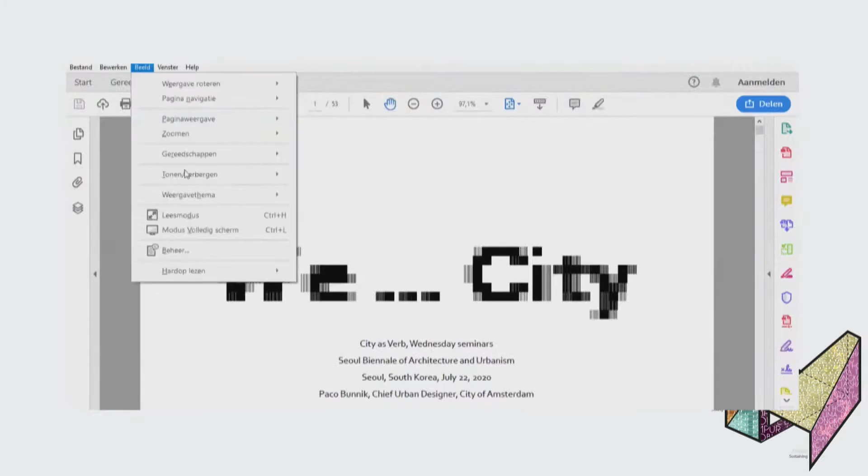Hi. Hi, John. Good morning. Yes, thank you so much for joining. Yeah, great to be here. Although virtual, it's very nice to be back in Seoul. Well, if it's any consolation, it feels like you're in the room right now. You're live. All right. Hey, what's the plan? Shall I start? Sure, that would be great. Yeah, okay, I'll share my screen. Yes. One second. Is this clear? It's perfect, looks very clear.

Okay, let's start. Well, thank you for inviting us to this seminar. In 2019, the City of Amsterdam participated in Seoul Biennale of Architecture and Urbanism. In my presentation, I will share some background of the approach of the exhibition, We City, and explain some more about the urban planning in Amsterdam surrounding this theme.

When asked to participate as a curator of the Amsterdam submission for the Biennale, I thought that the exhibition should demonstrate how we work with this theme of rethinking and reclaiming the city as a collective project. Not only the way we work ourselves, but also reflect with colleagues, supported by the embassy in Seoul, the Dutch embassy, the cultural attaché, which linked us together to Korean counterparts, with whom we had fantastic discussions.

We City, our exhibition, demonstrates how on an international level - here just a case we did with Zanzibar - we co-work and research on cultural exchange, and on a local level, how we are experimenting with collective and inclusive ways of urban planning.

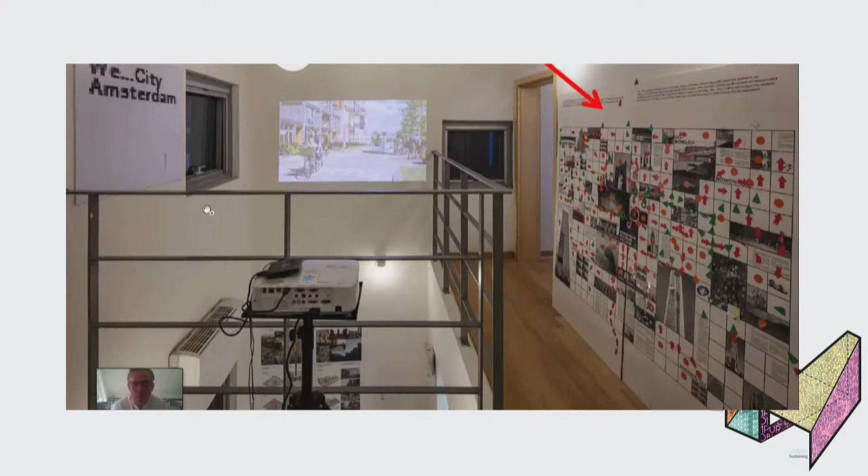So it's very interesting, I think. I would like to come back and talk to the students and maybe make these kind of itineraries, and by walking, discussing how the city is evolving. So we also gave them a wall in our exhibition, so that they were really incorporated in our exhibition.

I'll tell something about Amsterdam right now, what we're doing, how we're planning, where we come from, where we're going, and also reflecting on the Building the Resilient City theme, which is the 2021 theme for the Seoul Biennale of Architecture and Urbanism.

Amsterdam, this is a nice series of maps which shows the development of the city of Amsterdam, from the 1250s to right now. You see that it started as a fisherman's village right on the open waterfront, directly connected to the sea. And later, when the Dutch traveled abroad with the VOC, the East India companies, we got richer. And we founded this famous canal district city, which is right here.

And what you see happening is that because the city is growing, blue becomes green. So water is, we call it impolderen, it's made into polders, gained from the sea, made for agricultural purposes, to feed the citizens of the growing city.

Then in the industrial age, train lines were made, and more blue becomes green, and the city is still growing. Then in the 60s, you could call it the age of the car. New car roads were planned, new land was made. Also the surrounding cities were growing, as you see. But this is really car-planned modernism, in a way.

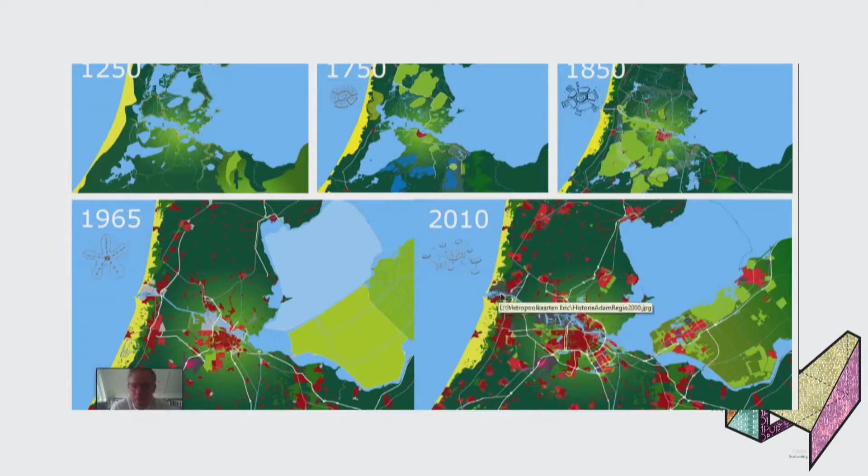And now we're coming to a state of sort of a network city, where we not only talk about Amsterdam anymore as a growing city, but as a whole network of a metropolitan region. So it's a different kind of approach. We used to be only Amsterdam, but now we are more like a part of a bigger system.

Amsterdam has a very strong and long tradition - not only Amsterdam, I think the whole of the Netherlands has a very strong tradition in water management. So partly we're below sea level. We have to control this force of nature, which is much bigger than us as human beings. So by engineering water for centuries, the way to govern it is very important, I think.

From farmer to minister, we had to cooperate with each other on a sort of horizontal level, and that makes, I think, the DNA of Dutch urban planning, which is quite integral, because you have to work together on all kinds of levels to protect yourself against a bigger force. So I think that's centuries of gaining knowledge, working together, and that's also part of the way we think and we design.

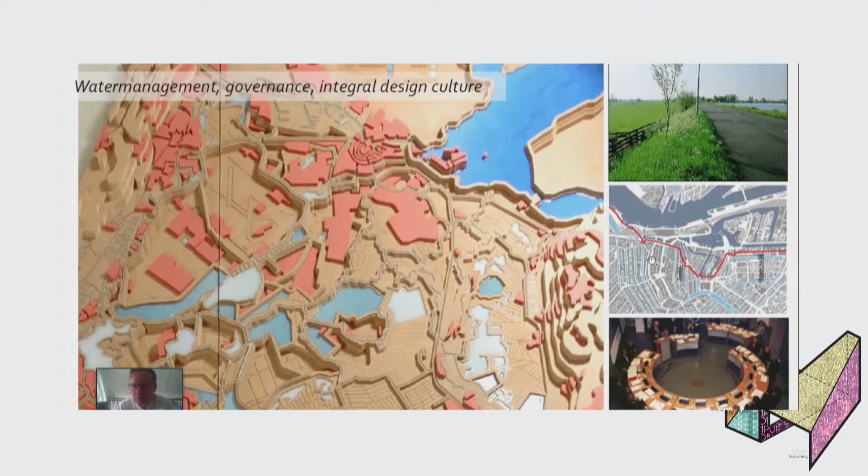On multiple scale levels - it's in governance, it's within the city limits, but also in the landscape. So it's all done in one system.

When you look at the city itself, this is a map we made in 2011. It's a bit old, but still quite active and right. I think the densification strategy, because we're growing - the city itself is about 880,000 people, the region is about 2.4 million. And what we said in the city itself, this is an extension plan made in 1934. There was first like this in a circle, and then these fingers came out in the extension plan of '34.

What we do now is densify within the existing perimeter of the city. So the city looks more or less like a hand - these are the fingers, and this is the landscape interweaving with the fingers, penetrating towards the center. We really like this scheme because you're always within a 15-minute bicycle ride of a beautiful landscape. The relation between city, landscape, and water is always eminent in Amsterdam.

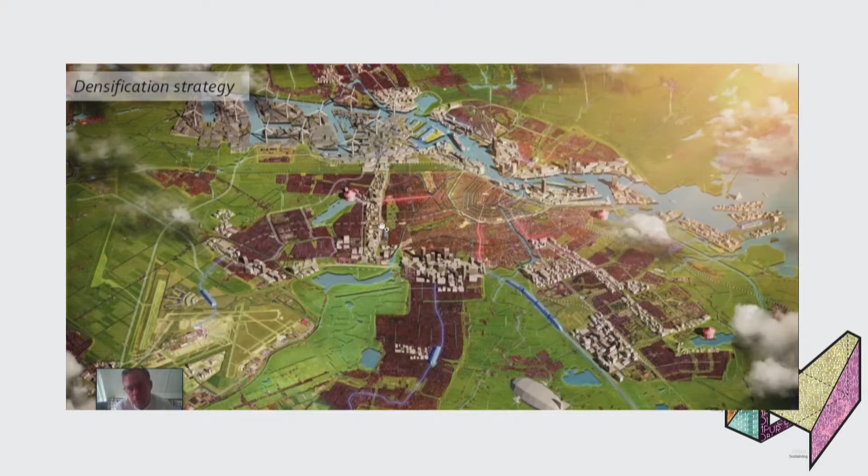Because we're growing, we have to densify within this perimeter of the city, and we do it in two ways: on the waterfront, which you see here, or on the pre-industrial zonings, or the car road, which is around here. So we try to make smart use of the space. Here we make new land, new islands on the waterfront, building new cityscapes.

But I think this is only about maybe 10% of the renewal. 90%, which is by far the biggest, are in these transformation sites - old industrial sites, non-used spaces. This is the biggest task we're having right now.

Amsterdam has a DNA, I think, with a local connection - it's founded on water. It has a relation with water in engineering, but also in beauty and culture. It's founded on the river Amstel, Amstelredam - built a dam in the river Amstel. That's why the name Amsterdam comes from, and that's where the old city is built around.

But the new city we're building right now is more or less built around these longer waterfront developments, and it shifts the center of the city more towards the bigger water, which is really interesting. In the mental perception of the Amsterdammer, the old center is the center of the city, but because we're growing more pluriformly around the center and along this waterfront, the whole mental aspect of what is the center - which maybe for Seoul is already totally clear - is not yet clear for Amsterdam.

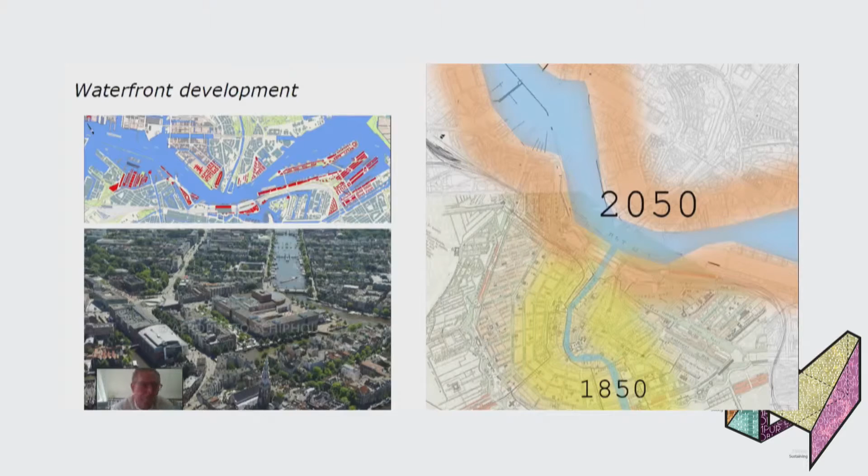So we're developing into a more broader system of urbanity, which I think is very interesting and very healthy for a city like Amsterdam. It's not only the city, it's also regional.

This whole waterfront is about 60 or 70 kilometers of re-engineering, let's say. The harbor is moving towards the sea, westwards. The city is growing that way, but also eastwards. We have Almere here, another city, building new islands, IJburg, maybe making new infrastructure connections. So in the future, you'll be maybe in 10 minutes within another city where you now travel for a longer period. Reusing the waterfront and densifying more is a very interesting way of urban design, I think.

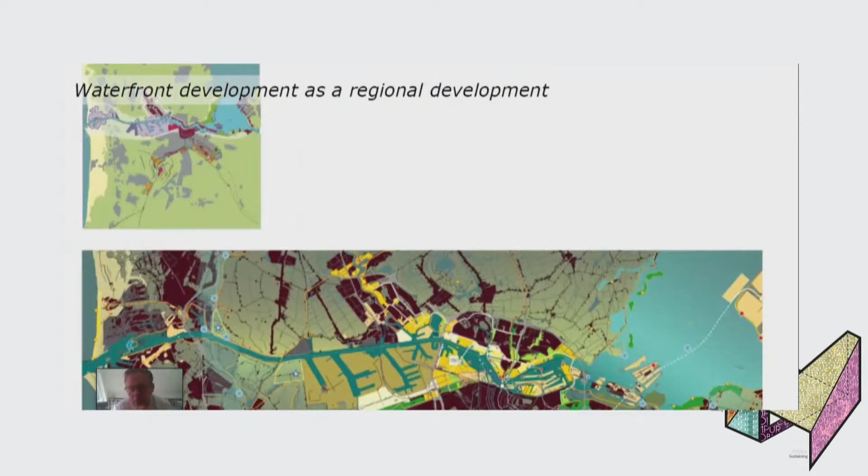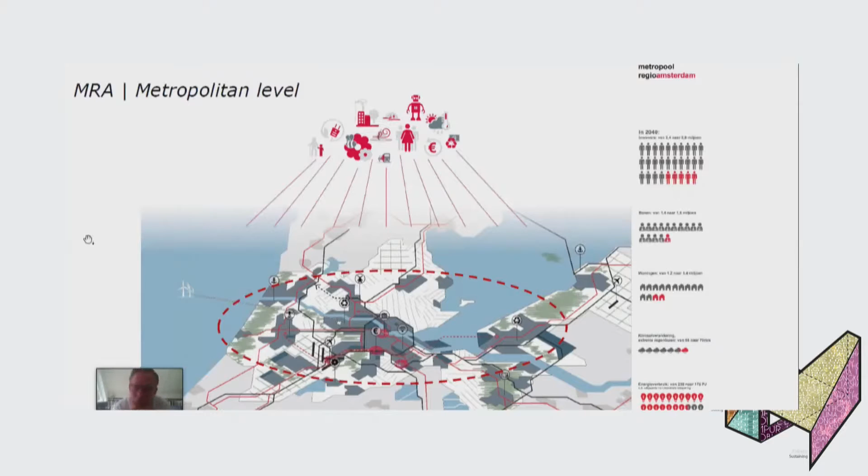So you see a picture of the metropolitan region level of Amsterdam - here are the bigger numbers, still growing in economy and jobs, also having to deal with climate change, and energy production and consumption changing fast. So how to deal in a bigger scope with these themes.

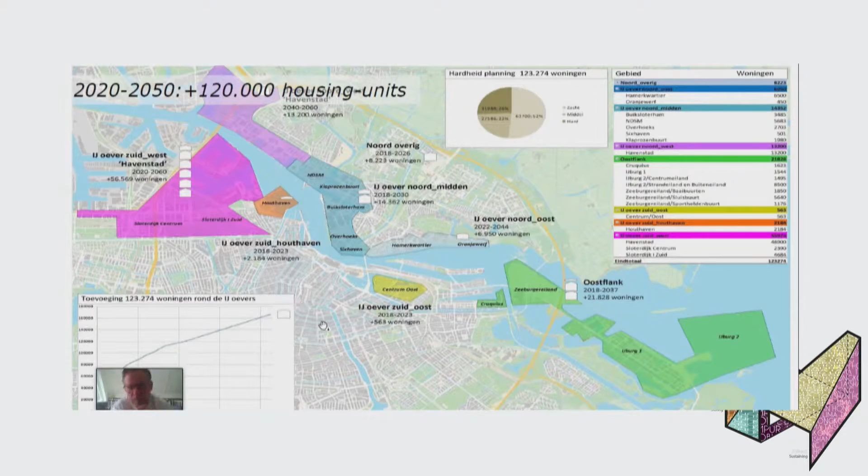On the whole, you see that within a not really big area, we're planning more or less more than 120,000 housing units, which is enormous. You could say it is a city within a city. And it's not only houses - you need public space, you need hospitals, you need new schools. So that's all part of what we're planning right now in Amsterdam. Within the existing city limits, we're densifying enormously.

Here are some pictures of already done and known projects. So the southern waterfront, Eastern Harbor, starting in the mid-80s, finished in the early century, 2005. IJburg - this is a new island made. Now we're currently designing a new plan on Zeeburgereiland, which we also experiment with new typology.

Amsterdam is not really known for high-rise, so it's sort of low-rise, mid-rise, some high-rise elements. This is the first urban plan where we really experiment with high-rise, also because it has a kind of position in the middle of long views, so it can be interesting to test with high-rise here. But we also make other, more suburban typologies, a bit further out of the center, which have more of a natural or beach-like character.

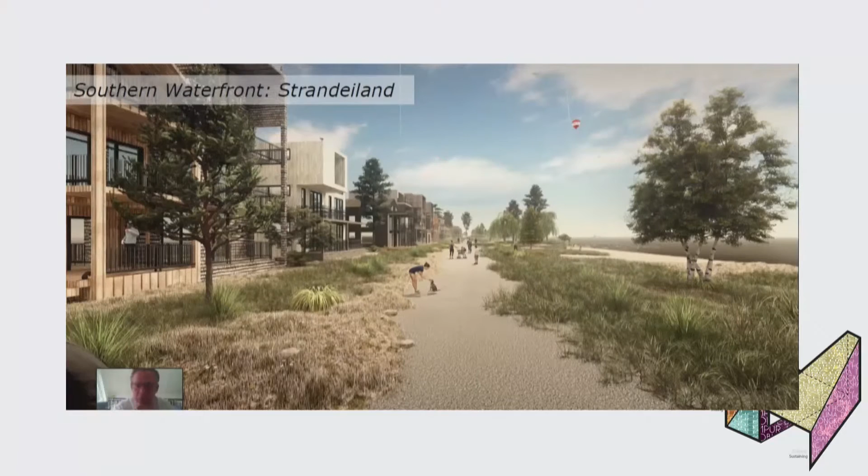So it's a catalog of urban design on many levels. Very important in this whole waterfront strategy is the investment in public domain, not only in public space, but also in landmarking and programmed landmarking of culture. On strategic locations on the waterfront, we planned nice, beautiful, big buildings with, for example, a film museum, theater, courthouse, and museums, so they have a fixed place on this waterfront, and you can experience it by boat, also from the point of culture.

And this means an enormous revenue for the city, so it's always multi-dimensional. Originally, interestingly, the city itself planned to have a sort of urban business district on the waterfront. But then the first bank, the client ABN AMRO, decided to go more near the airport, and out of that plan the central business district was founded, so the whole waterfront ended up more or less without big business.

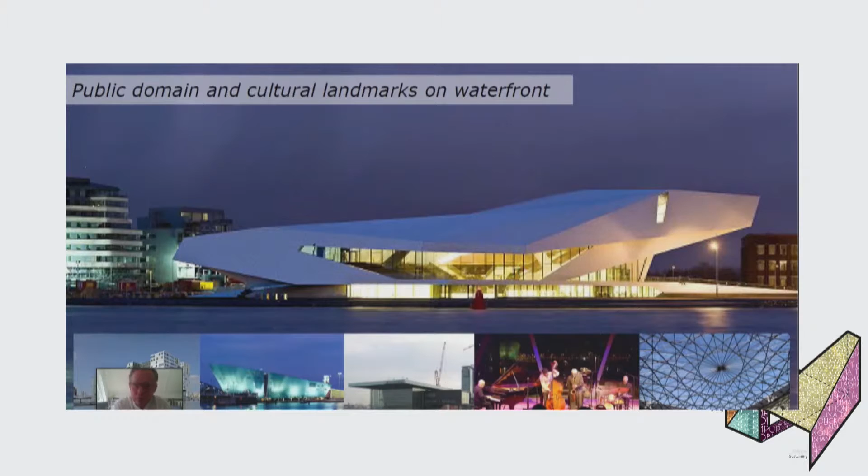It's more culture, housing, and public space, which really defines the character of that waterfront. Public space is very important, so how to invest in it so it can be adaptive to climate, but also to different kinds of uses. I think in any waterfront project, the huge investments will be in public space.

When we go to the northern waterfront, this is also what we exhibited in Seoul. We look at a totally different kind of cityscape. On the southern part were harbors, not really polluted, just remnants of harbors which were empty and redone into new city. But on the northern waterfront there were really large industrial sites, very polluted areas, very hard to make new city schemes here. Anyway, we're working on it, and doing it quite successfully, I think.

Here I will show you some projects. This is the NDSM, a former shipyard. It used to be a secluded island with the water going around it, and these are remnants of the old shipyard where really big ships were built. When it was empty for a few years it was squatted, and then the city made new plans to build a sort of new urban area across the whole area.

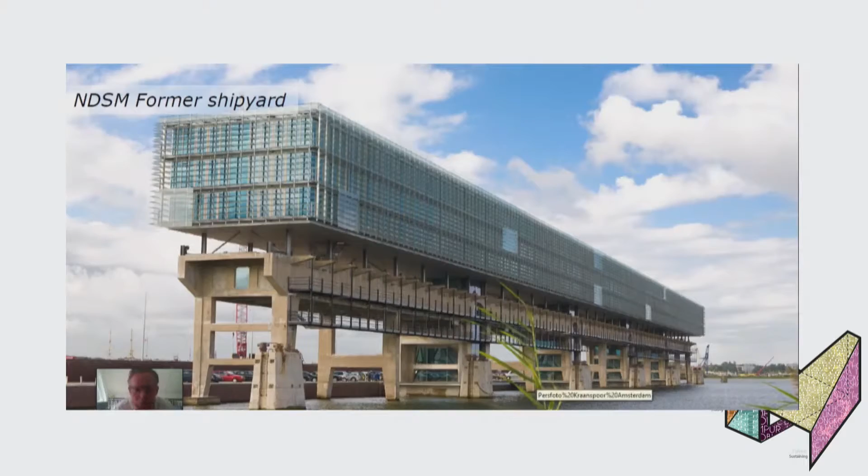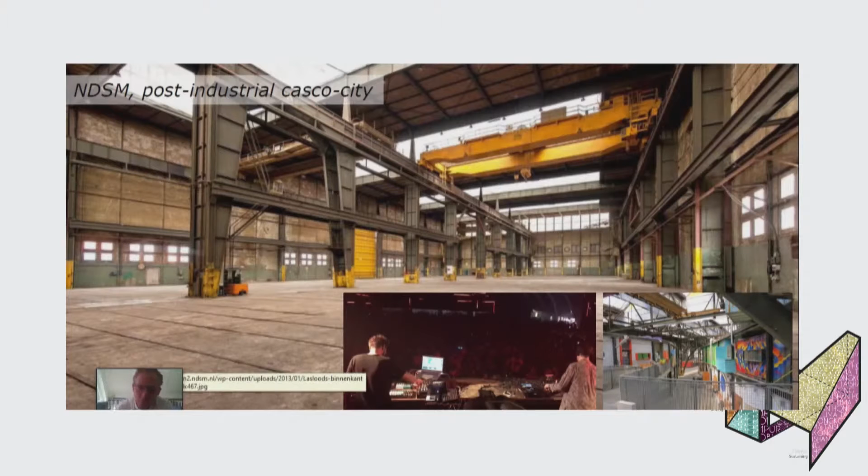Here's another example of how to reuse this kind of post-industrial site. These were the slopes where the big ships were built and sent into the water, and now we use it for big festivals, etc. Within these huge cascos of old industrial structure, we plan a variety of programs, dance festivals, artist villages within, so this whole casco city gives huge liberty for cultural programming for the city itself.

This year we'll open up the biggest street art museum in the world, also here. It started really local and small, but now more famous artists have come in, already visible in the area. This is going to be professionalized, and it's becoming, I think, a really important museum in Amsterdam and maybe worldwide, celebrating street art.

The Amsterdam urban planning system was quite top-down for maybe decades, and now we are trying to develop methods where we can include external professionals, young architects, habitants, stakeholders, etc. within the process of planning. It's not easy, but you just have to do it and see what comes out. This project, for me, was the first real test case of how you could do that.

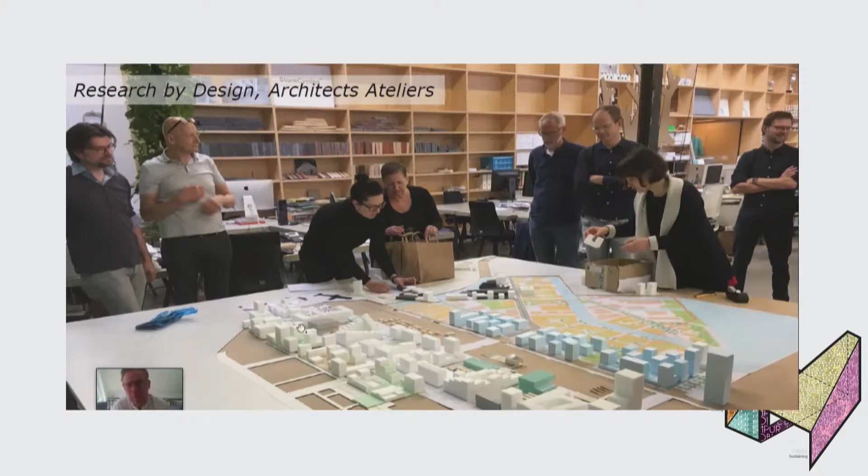Normally you make a top-down plan as an urban planner, but here I invited 4 architects' offices, young talented architects, of which Space and Weather is one of the offices invited, with Tjeerd. Our own design team was included, and also a landscape architect. So we had a really integral design team of inner people and outer people together. Every week we came together, building a big model, changing ideas, and slowly we came to a final plan.

Not only that, we also incorporated participation on the green vision, with local residents who were quite sharp, because they knew their surroundings would be intensified. Now there were about 1,000 houses, and when the plan is finished, there will be 8,000 houses. So their whole surrounding is changing, and they really wanted to be sure that we incorporate enough green and quality in the urban plan. So we invited them too, to show what we're doing.

And I think this is really special. This is our vice mayor, Marieke van Doorninck, who also addressed these habitants, these people, by showing that we really try to work together with them to make a plan. It's the same as last week, when we had a lecture from Paris, and I think the mayor there, Hidalgo, really has a strong feeling for urban planning. The willingness to really open up and show that urban planning is important, also from a political standpoint, is quite important, I think, for our job.

So here are some pictures we made. What we did is we really searched for the history of the area, the industrial history. For example, here we found old pictures of a building demolished in the 60s. It was built in the 1920s and was an old waste plant directly on the waterfront. What they did then is collect waste from the inner city, ship it over water, and it was treated here in this plant.

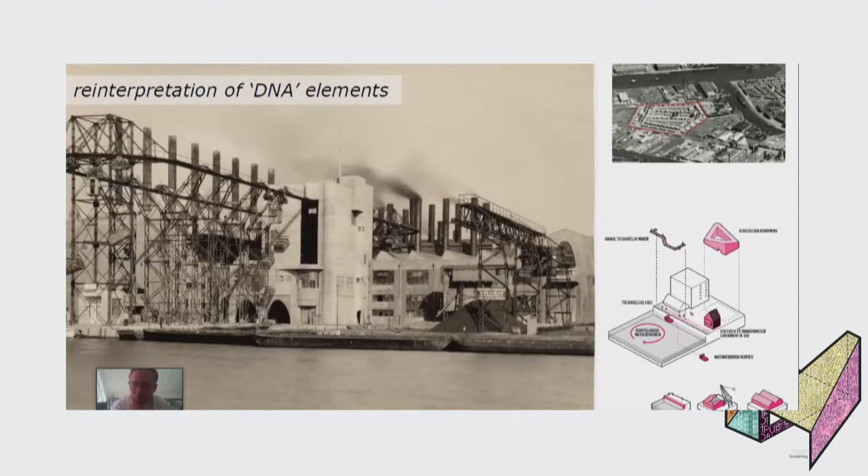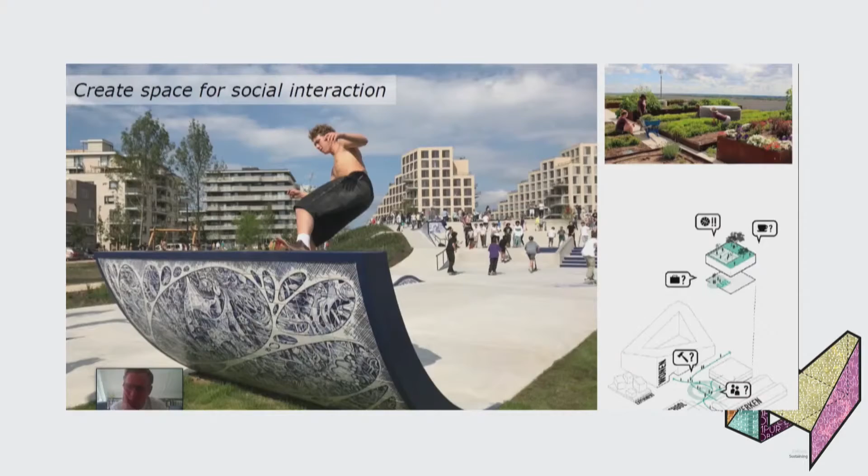We also say that urban planning right now is not only building programming, but maybe the most important program is public space itself - creating places where people can interact, sport, etc. So thinking about the in-between, what it means and how people can meet, is super important for me.

When we reflect on the theme for the next Biennale, which is building the resilient city, I was also thinking, okay, what are we doing right now in Amsterdam, and how could we maybe contribute next year and have a discussion afterwards here. So some themes I will show you.

Amsterdam has a very strong bicycle culture, and what's interesting is that it's growing quite fast. In 2014, the modal split was 32% bicycle use. It's now already at 40%. So the bicycle and the pedestrian, they are used the most.

But what you see in reality is that there's a kind of unfair system of using space. For example, the bike is used mostly by our inhabitants, but the use of space is totally different - here, car parking space. You need a lot of space for car parks, which 97% of the time don't move at all, and about half the space is used for car parking.

So we can plan much smarter in public space to give more meaning to this interaction and to mobility systems. I think we are in that period of transgressing there. This is a picture of the Stationseiland, nearby the central station, where until now many bikes are parked. There are more bikes than inhabitants in Amsterdam, about 1.2 million bikes around, and you see them everywhere, parked and consuming space.

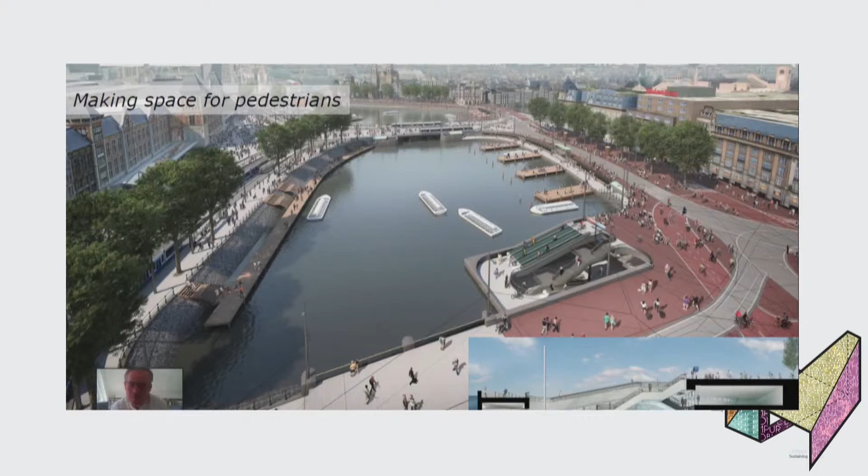This is on the front side of the central station. And also on the backside, on the waterfront, which is a really beautiful area with big views, we do the same—we make a new plateau and underneath bicycle storage. Right now when you go to Amsterdam, you see this big bicycle storage on top, blocking the view. But this is under construction right now, so in two years' time you'll have an open view on the water.

So the whole quality of public space and spatial quality is, I think, number one for pedestrians. Not only here—we do it on many places, many big squares.

This is Zuidas, a central business district. It was a totally stone square with no trees, nothing. We redesigned it into a more green area with many seating places. It's very important that you give people the opportunity to sit.

But not only that—underneath, also here, underneath the whole square is a bicycle parking. And underneath the bicycle parking is a one meter storage tank for water. So in cases of heavy rainfall, this whole system contains the water. It's integrated thinking, design thinking, which is social, cultural, biodiverse, but also water management in one element.

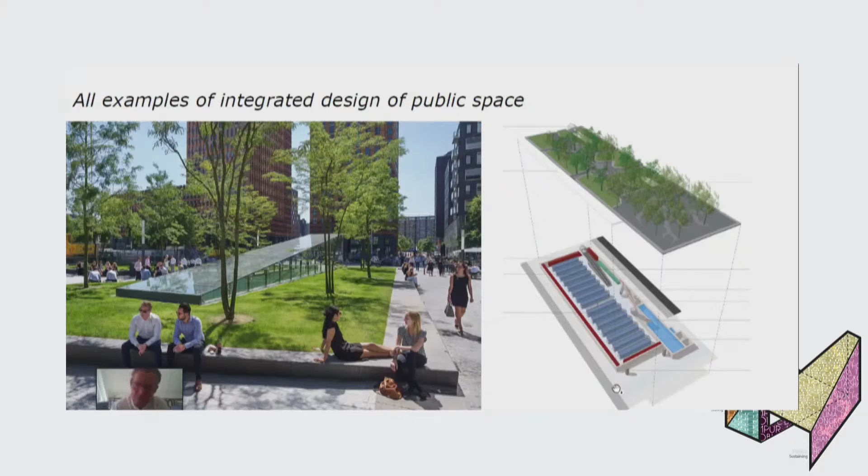So that's the way we try to plan our cities. Colleagues of mine are now working on a quite successful program—it's a new Amsterdam integral design method. I think it could be interesting to maybe show it next year in the Biennale. It's a really refined method of how to deal with public space in this kind of way.

So we're doing research on multiple themes, which is about water management, materials, mobility, soil, underground, energy, flora, fauna—so nature inclusive. And we find all kinds of possible combinations and measurements in design to incorporate all these elements.

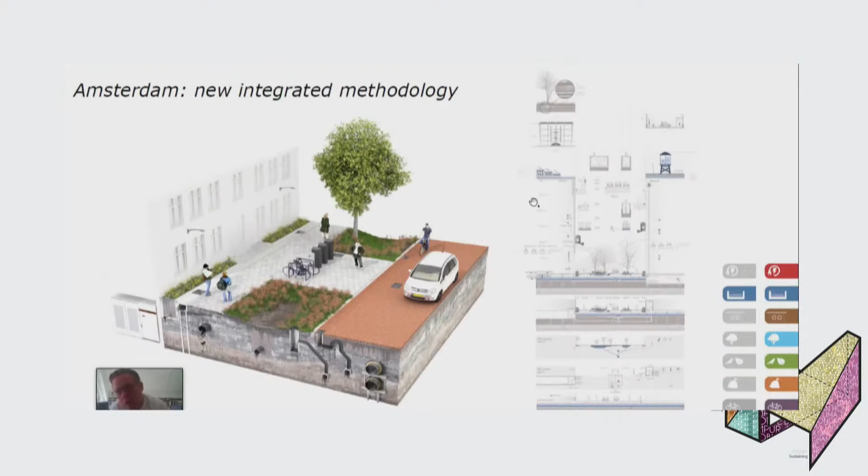I will just show shortly one of these parts, which is water management. So we really study the public space and the buildings together, how they work, how they're measured, how the water is working, and how we integrate them into the new standard way of designing a street network.

This, I think, is just one picture of hundreds, but we're really working on this integrated way of public space design. I think this is my last slide before Tjeerd starts.

When I think of an inclusive city, I think it could be really biodiverse, productive, very important, inviting—which also Seoul is, I think, by heart—and adaptive. You should plan in a more adaptive way. And I think not focus on fear and control, but focus on well-being of nature and of people.

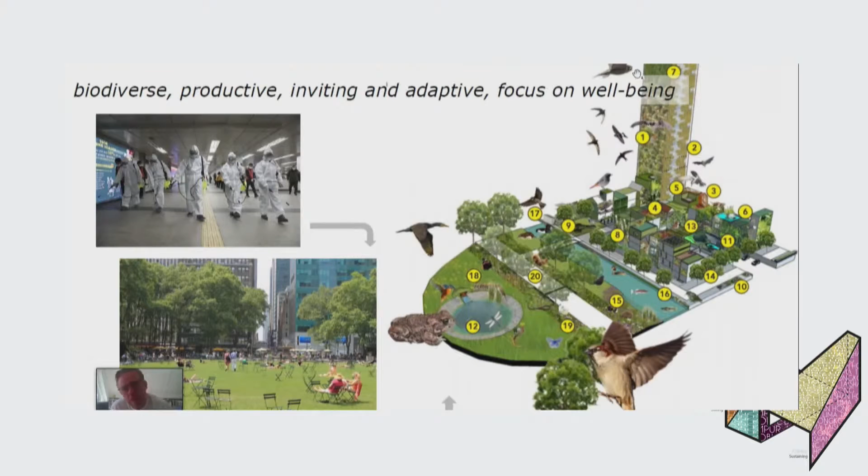I think this is my last slide. This is a picture I found on the internet—the people of Seoul thanked the workers who fight COVID with new technology. I think this is a great picture to end my story. Thank you.

Great, thank you so much. We have a lot to learn from each other. This is going to be exciting.

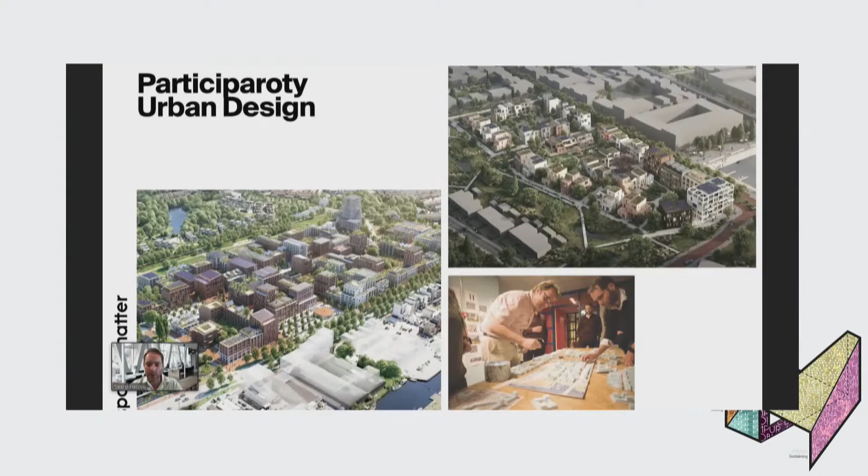We do that on multiple levels. This is the larger level, the participatory urban designs, mainly in the Netherlands. We make plans preferably together with residents or people that already live around the areas. Mainly in Amsterdam we are working now on 3 different urban plans, and some others in the south of the Netherlands. But what also characterizes our office is our bottom-up ways of working.

When we started in 2010, there were no commissions because of the financial crisis, and we had to come up with our own ideas and concepts, and start building projects out of those. Nobody called us for a commission, and that led to particular projects like the Sweets Hotel that John already introduced, a hotel that we made out of 28 bridge houses in Amsterdam that were becoming redundant.

We also initiated a large rooftop urban farm in The Hague, where there's 1,200 square meters of grow beds for crops and 500 square meters of fish beds below them. The dirty water of the fish is pumped towards the green beds to feed the plants, so it's kind of a circular loop there.

Another thing we do frequently is helping bottom-up building groups realize collective residential buildings, and we've done around six of those. We really promote this way that people themselves come up with ideas and create their dreams, instead of having a commercial development just build something that fits everyone, which gives you boring buildings.

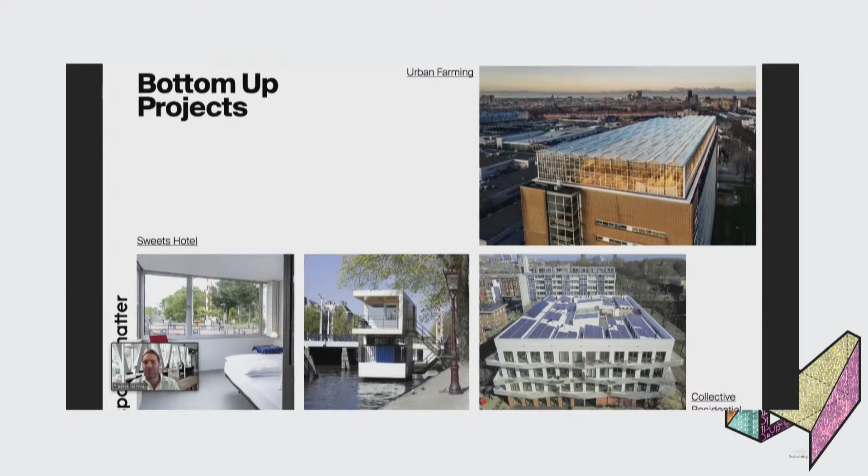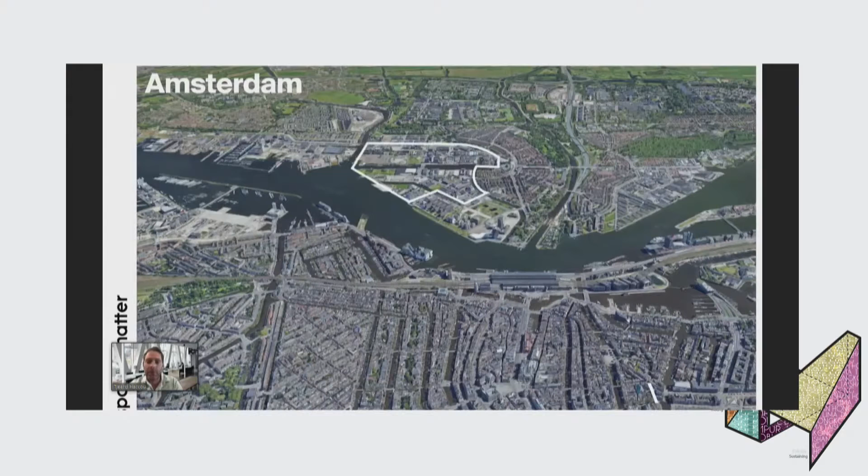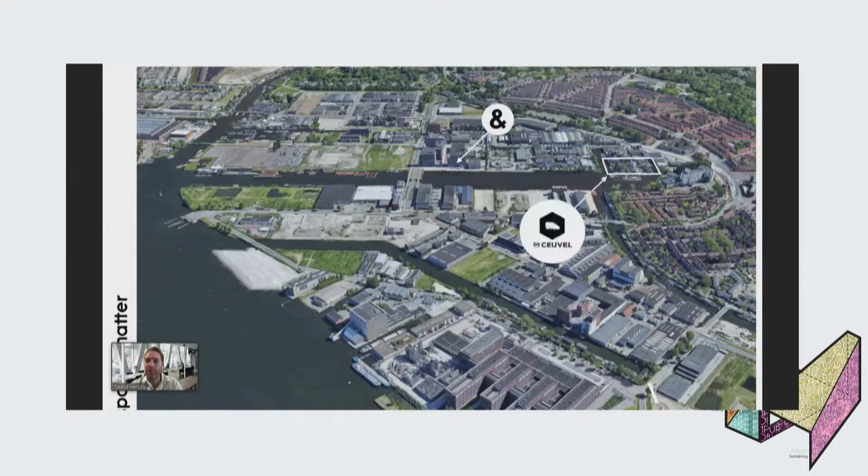Today I will talk a little bit about the Buiksloterham area that Paco already introduced. It is in the north of Amsterdam, and our office is right in the middle. This is also the place where our first projects really started, and two of those I would like to tell a bit about: De Ceuvel, and Schoon Schip, which means clean ship.

Another thing that might be relevant for this presentation is the self-built houses, and the arrow shows where my own house is. So I both live and work in the area where I also have the most relevant projects that we do. I made a 5-minute city for myself.

This Buiksloterham area, as Paco already mentioned, used to look like this, a very industrial zone with a lot of heavy industries, the Fokker airplane factory, waste treatment plants. That led to highly contaminated soil all over the area.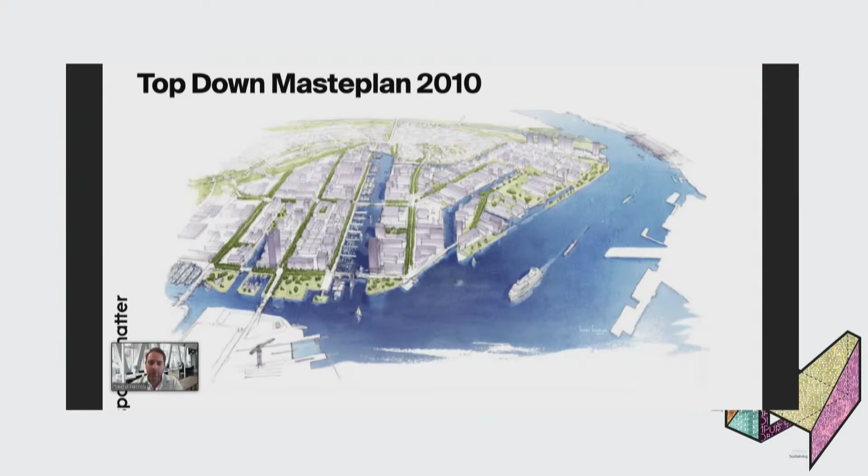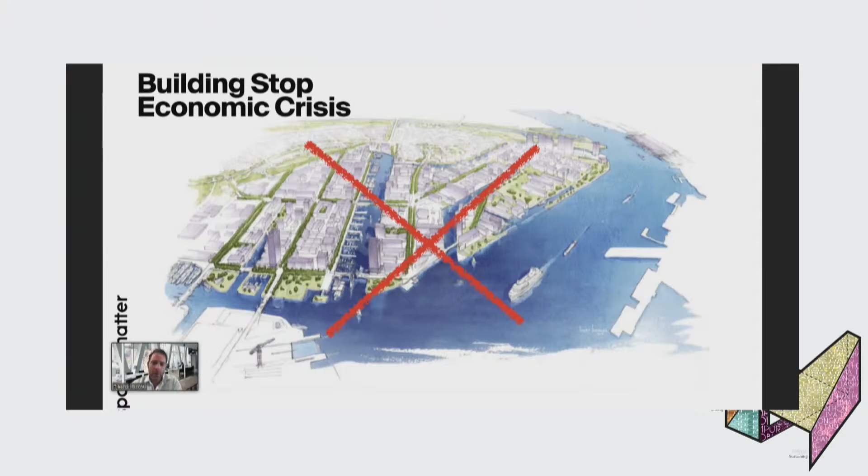The municipality had big plans for this zone, or still has, but they already had it before the financial crisis. They made a huge master plan for about 8,000 houses, and were speeding up in the lead to 2010 to implement this master plan. But then the financial crisis hit, and all the developments in Amsterdam came to a stop because commercial parties did not want to invest anymore. Plus the municipality also had to pay a lot of money to get things going, and that was not possible in those times. So Amsterdam came up with the idea: what if we let our citizens come up with plans?

Then Buiksloterham became a test area for self-built housing, both on very small scale, as individual housing, and as collective buildings.

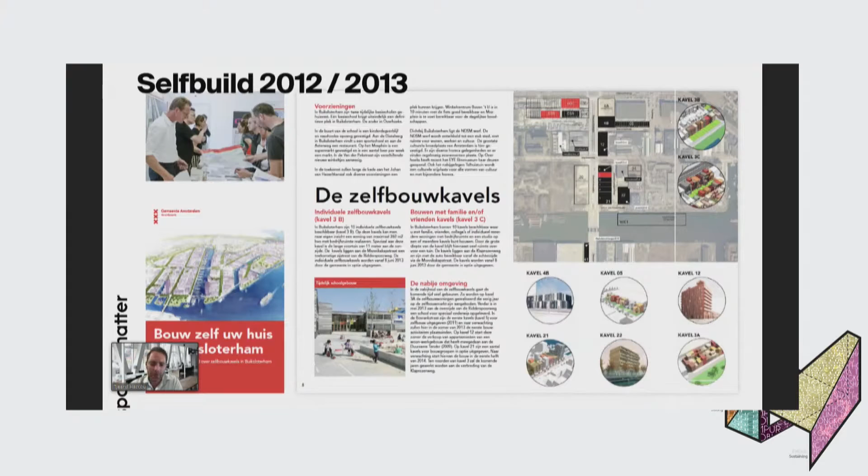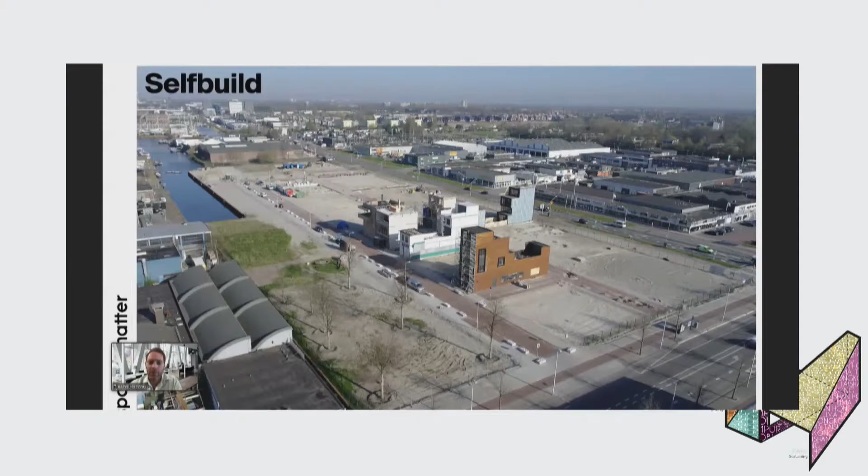Well, the start of this was very slow. Personally, I also managed to buy one of those plots, but no one else wanted it. This was, I think, 2013, when it was kind of an unpopular way of building your house and of living. But then when it started and people saw the potential, it became quite a popular thing in the years after that, so it climaxed in, I think, 2015, when people were camping out to wait in line for 6 weeks.

And this self-built camping site became news in itself, because it's kind of a micro society that invents their own rules of how people should behave in standing in line for their plot. It was an interesting process.

Well, so we had these self-built small-scale initiatives, but also the more collective buildings. This is, I think, seven different buildings, also in the movie playing behind you, that were initiated by building collectives. This is actually how large parts of the Buiksloterham are now developed. It's bottom up - people that form a community, have their own idea about housing, and build with an architect the house that they want, without a commercial developer guiding them.

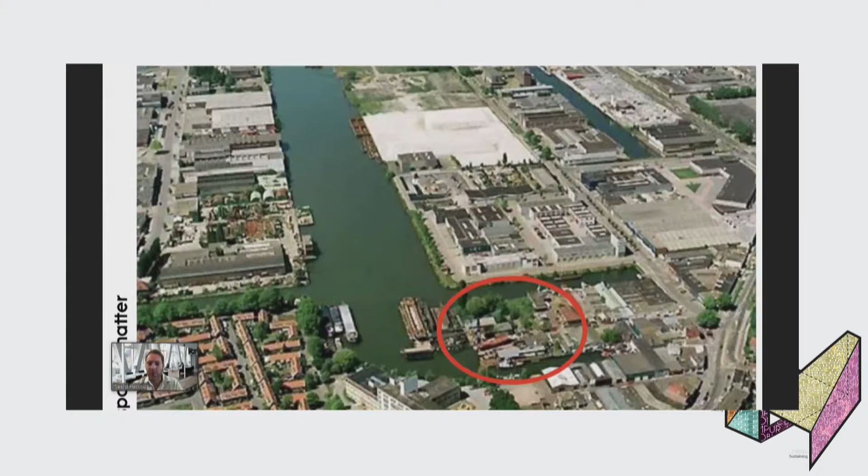Well, sorry for the bad quality of this image. This is a picture of the Ceuvel in its state before 2000. This is the project that I would like to share with you. This is an old shipyard. Here you still see it in practice as a shipyard.

But when we found this area in 2012, it was not a shipyard anymore. It was actually the municipality that had this land, and they thought, well, we need to do something with this. This whole Buiksloterham area back then was a very no-go area. It had all kinds of very small industrial little companies working there. As a citizen of Amsterdam, you wouldn't want to go to the Buiksloterham.

Then the municipality said, well, let's launch a tender for this empty vacant space, and ask commercial or market parties if they would like to build a creative incubator on top of this land. But there were a couple of issues.

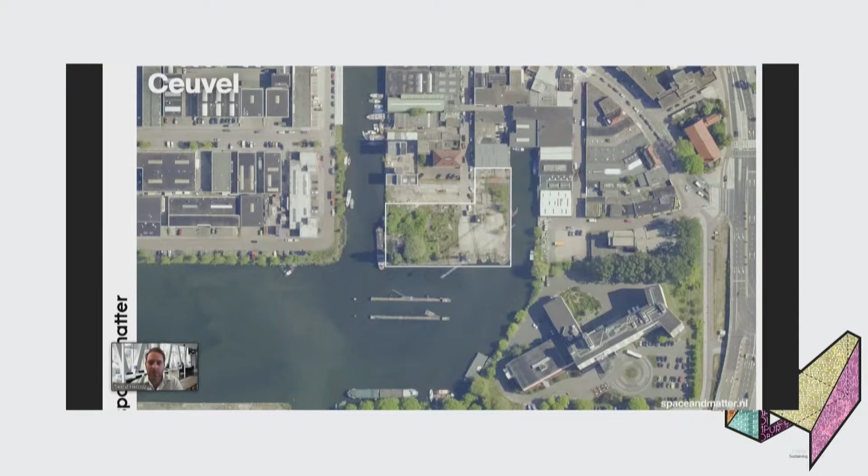So in the whole Buiksloterham, the land here on the Ceuvel side was very polluted - a lot of contaminated soil. Another issue was there were no buildings. So making an incubator space for people to work, where are you going to position them? And an incubator space is meant for people in the creative industry to find very affordable office space, so there is very little budget. But if you came up with a plan that would be realistic and manageable, then you would earn a 10-year lease from the municipality of Amsterdam. So no money, but soil.

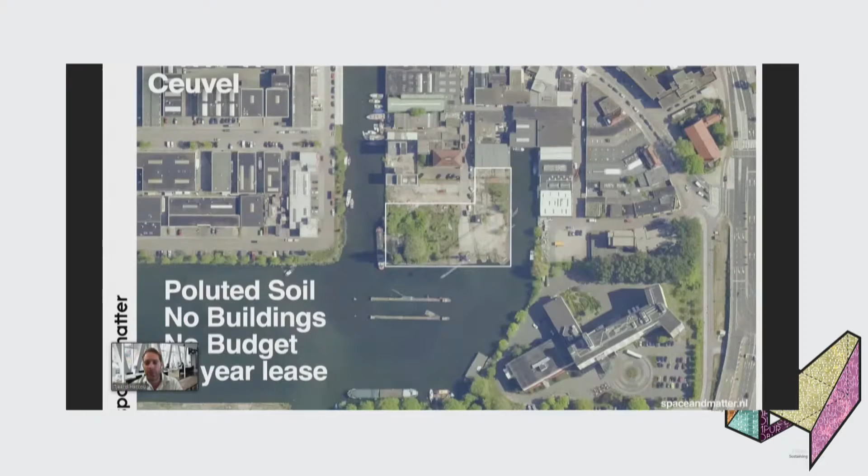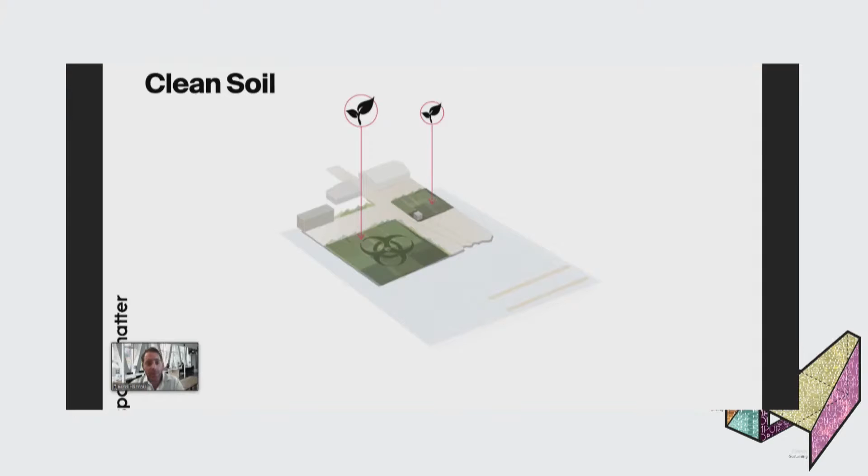Then we started to think, how can we deal with these issues? We formed a group of, I think, a couple of architecture offices and a landscaper. The landscape architect came up with the idea to use phytoremediation to clean the soil - you plant plants, and the plants suck up the contaminants and use them to grow. If we make the whole area a kind of green garden that cleans the ground, then we could leave it in a better state after 10 years.

Then another idea we had is why not put old houseboats from Amsterdam on this found garden, because houseboats in Amsterdam have a negative value when people want to renew them. People in Amsterdam who have a mooring position for their boat and want a new one have to get rid of the old one and get it demolished. So we thought, well, if they don't want to demolish it because they have to pay like 10,000 euros for demolishing the boat, then we take the boat for free maybe and put them on land. So then we have free space.

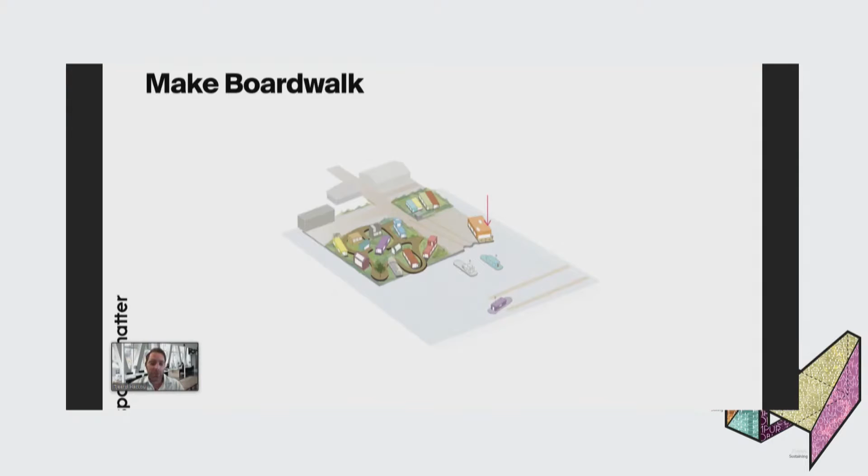Then when we position all the houseboats on the land, we make a boardwalk to connect them and to keep people off the contaminated soil, and we use the land as a creative incubator. Then after 10 years, when we need to leave - which will be in about 5 years from now - we just put the boats back in the water and sail to another location, leaving the Ceuvel as a greener and cleaner place than we found it.

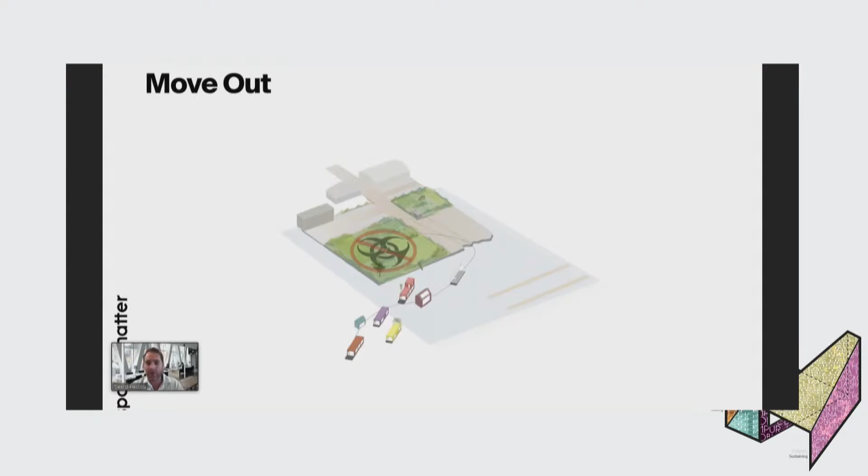So that was our plan, and we made a visualization with that. And then in 2012, we heard that we actually won the competition. We were very happy, and we did not do it alone with designers, but also with a lot of entrepreneurs who already came up with an idea how they would like to work on this land and what they wanted to do with their houseboat.

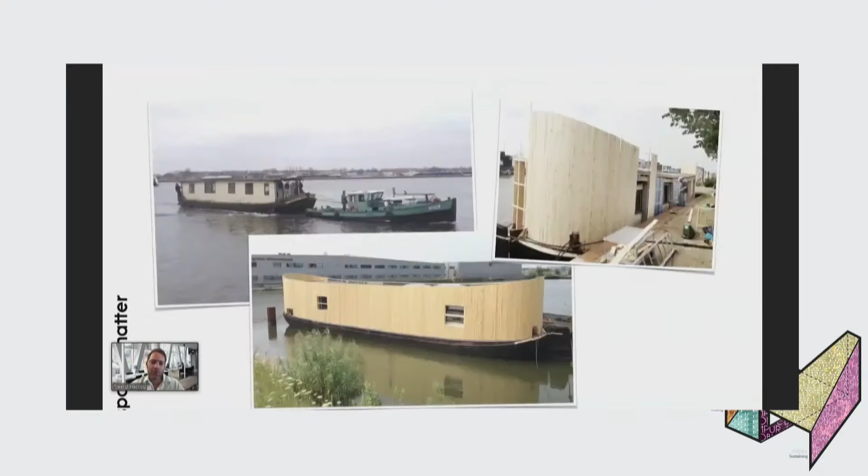So this was the first boat that we got. We paid €1 for it. It was in terrible state, but with a lot of help from the people who eventually rented this boat, we could manage to revamp it, make a new facade around it, also make it way more sustainable and insulate it in a proper way.

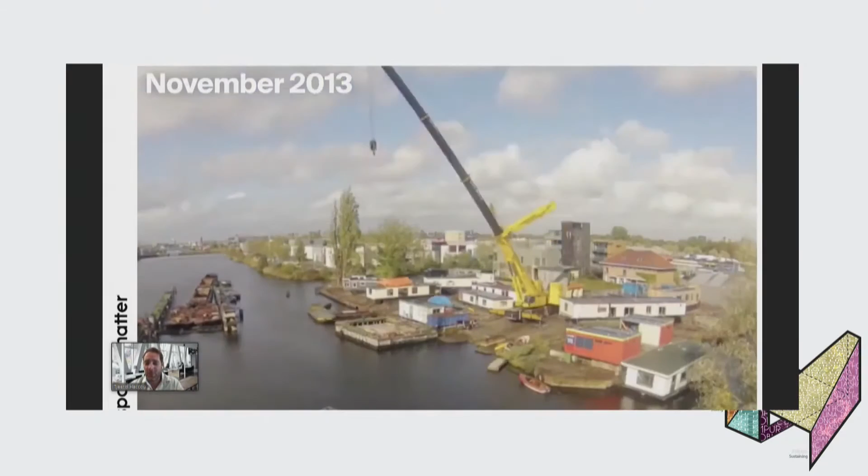And then in November 2013, we collected all the 16 boats that we managed to buy, and we put them on the land with a huge crane. We got a lot of weird objects, and I think the average price here was really €1 per boat.

And in this way, we managed to create a lot of very low-tech innovations, but that led this Ceuvel development to be close to an off-grid development. And the nice thing about it is that it is always in development, so more and more innovations come to light every year. So they're really building it to become a very sustainable place.

So there's solar panels on all the roofs of the boats. There is an aquaponic farm with fish and this greenhouse on top, and it has the same circular system as the greenhouse that we made. There's floating gardens. There is a boat that produces biogas from the waste of the houseboats, on which you can then eventually cook pizzas in the restaurant.

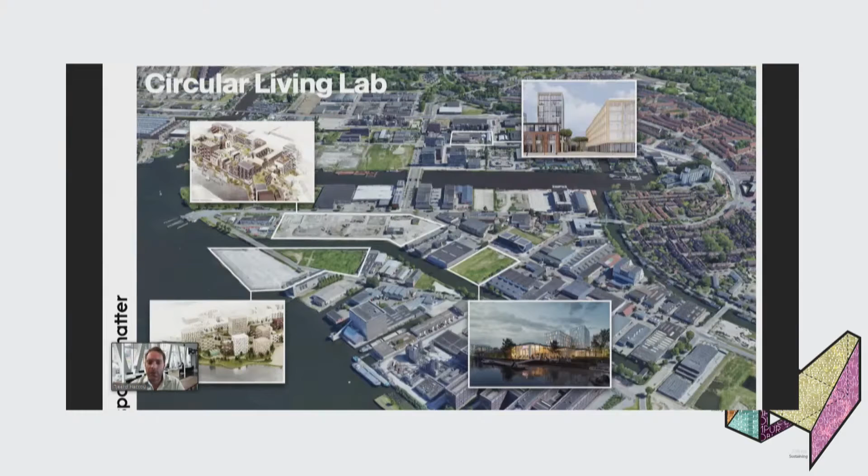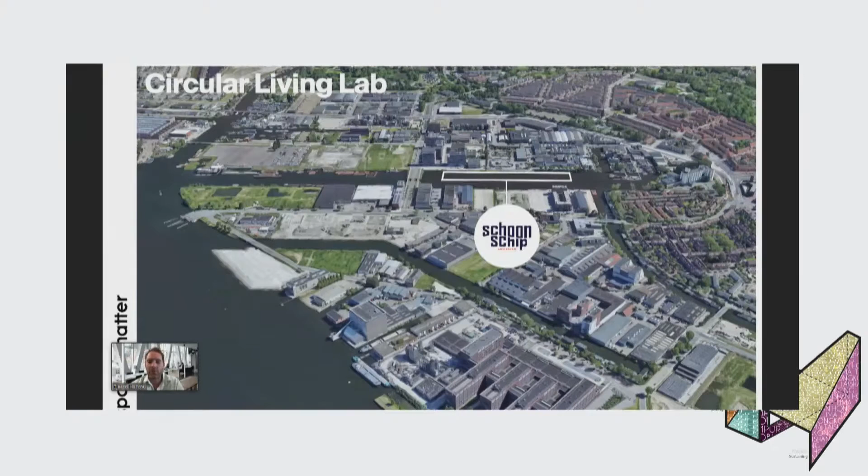And this whole Buiksloterham will then become a kind of ecosystem network. One of the most advanced projects in this area is Schoonschip, Cleanship, in which we took a lot of the ideas developed at the Ceuvel, scaled them up, and put them into practice for a residential project. Schoonschip was also a real bottom-up development.

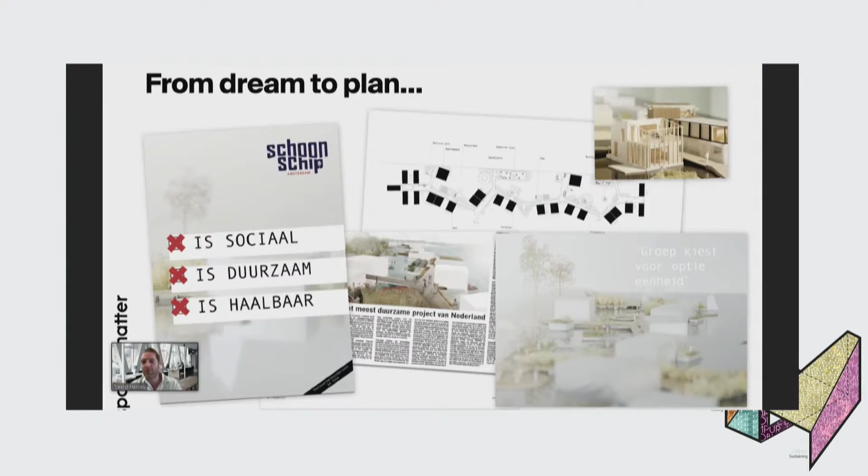So we made a booklet, nice visualizations and a nice model, and then we went to the municipality of Amsterdam and asked, can we have a place for this? We just need a plot of water. And we managed to get one in the Buiksloterham area, as you can understand now.

We had this idea to make it a very floating eco village. There are currently 46 households living here on 30 floating villas almost. So we helped the group create an urban plan for them. What they thought was very important was that they could all have their individual house, so we made a plan for different building envelopes that they could then fill in with their own architects.

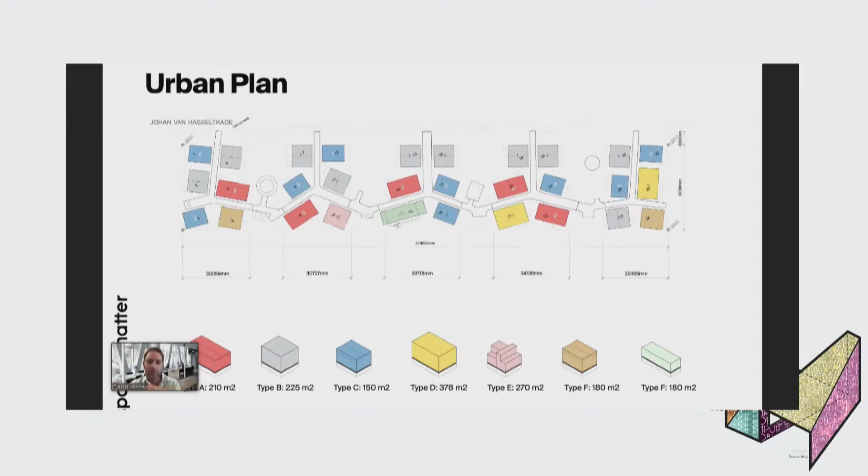This plan was also optimized using some AI to get the best views for everyone and the best production of solar power. So everyone could pick their own architect, and with the building envelope we gave them, made their own housing design.

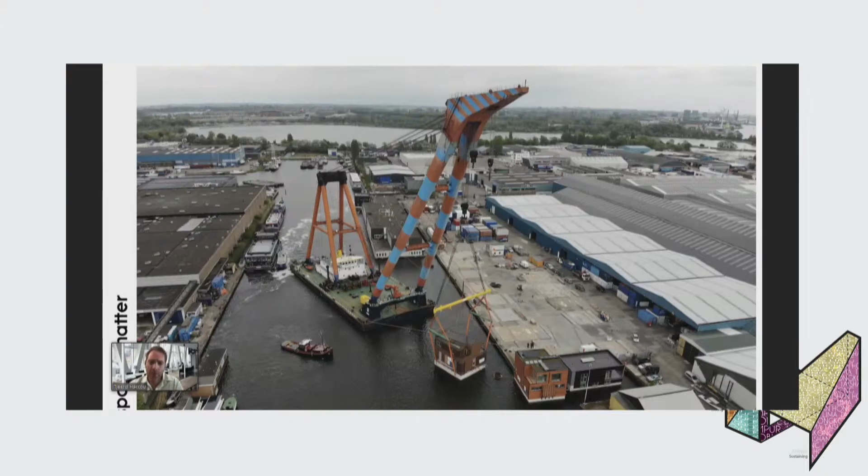One of these boats weighs around 200 tons, so they're very heavy. This is the largest floating crane in Europe that we needed to rent for a lot of money to put all the boats into the water. Then, I think it was beginning of 2019, the boats came floating in.

Here you see the potential of building on water, that you don't really have a local building site, but the building sites can be elsewhere. And then you can just, by floating them in, build a neighborhood overnight.

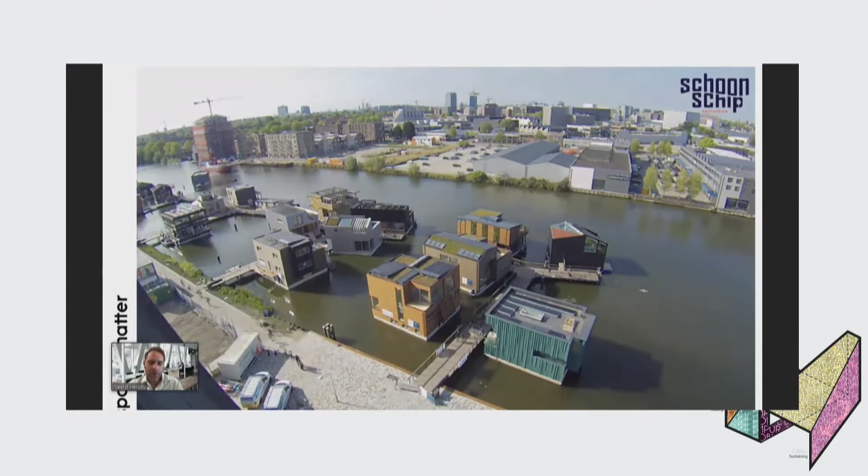So Schoonschip has a lot of collective features, sustainability features. They share 500 solar panels. Each boat has a battery pack in the boat. They have heat pumps that use the water they float in to balance the heat in the house. They also have vacuum toilets, a smart grid, a lot of these things.

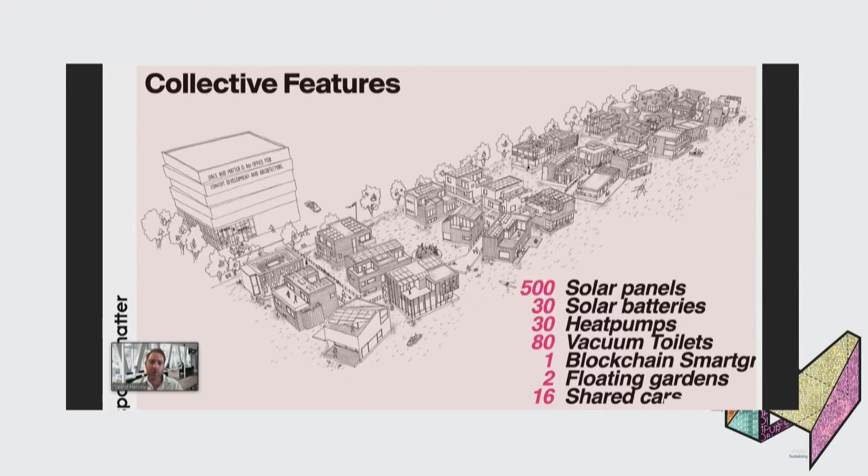All these individual boats are then connected to the smart jetty, as we call it. In this jetty there's all the infrastructure to make this neighborhood a smart neighborhood.

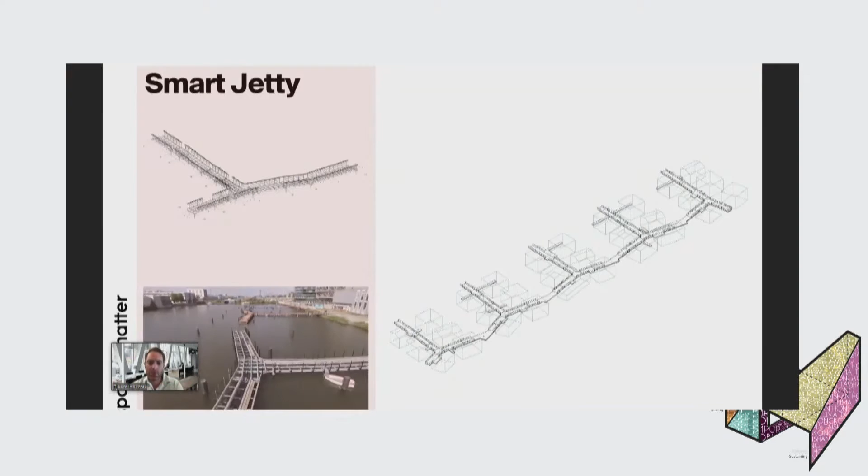This is one of the coolest things in the area, the sewage system. Everyone has a vacuum toilet connected to a grid, a local grid, and the grid goes to this biorefinery that you see floating in on the left side. This biorefinery exchanges the toilet waste into energy and biogas and fertilizer.

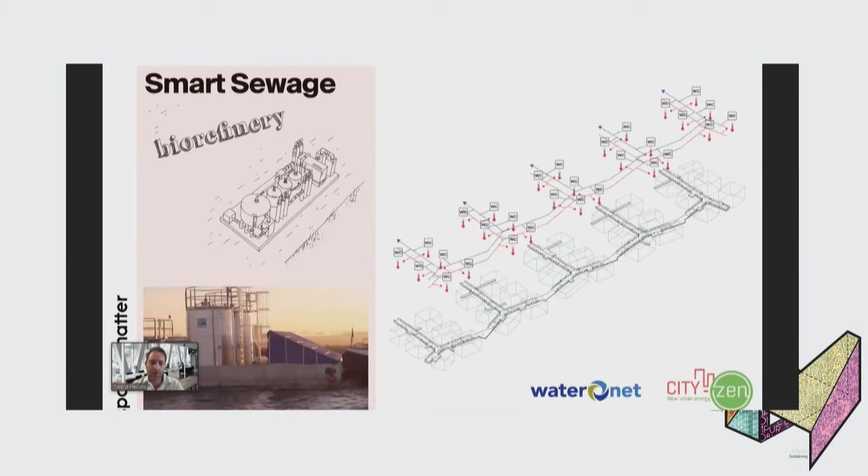Then the fertilizer is sold to farmers in the area, and the biogas is used to heat up the boats again. So that is in a circular way - you don't have waste, you just profit from everything.

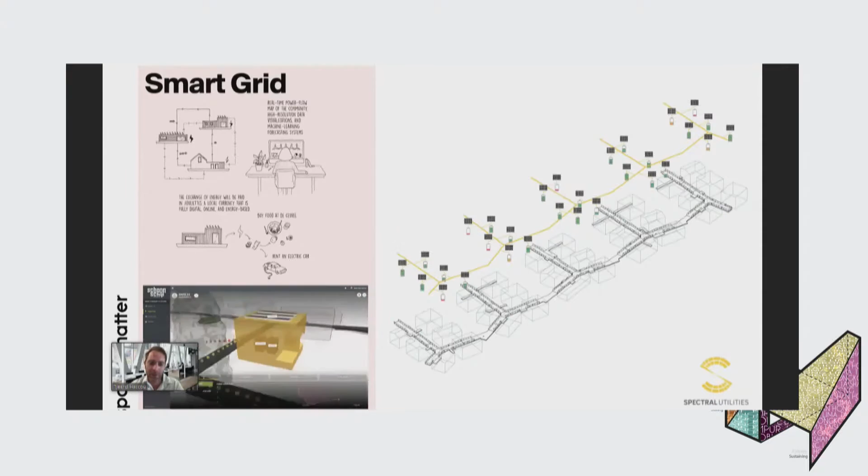And then there's the smart grid, a bit of an upgrade from the smart grid used at the Ceuvel. People also have a dashboard at their house, so they can see how much power they produce and how much they consume from their neighbor. So they can really trade energy with their neighbors.

In the house itself there's also a lot of smart technology, also for instance water. Being smart with water, they have a recirculation shower that filters the shower water and circulates it onto your head, so you only need 3 liters of water and can take a shower for 20 minutes without feeling sorry about it.

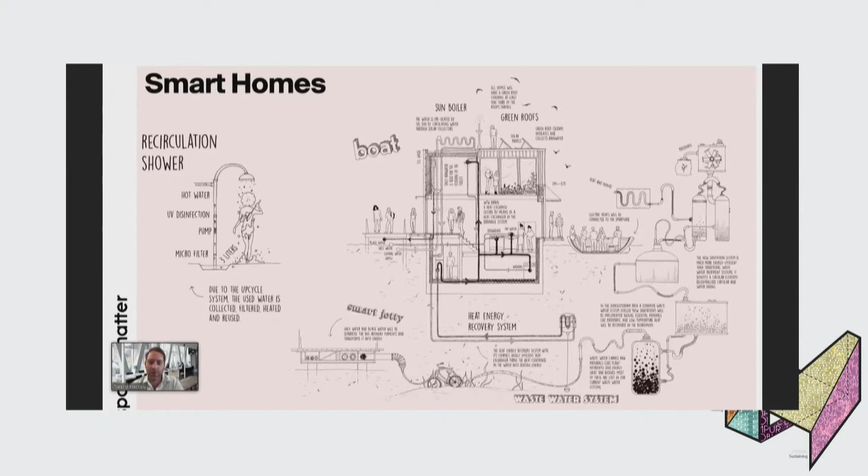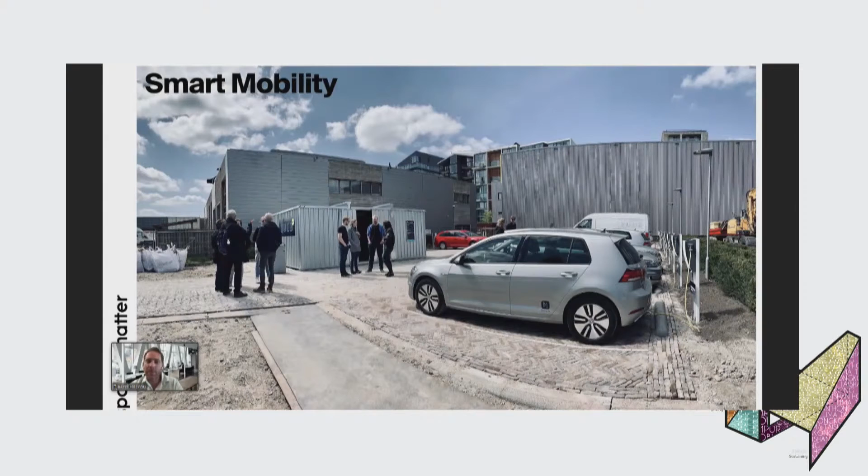The Schoonschip community also shares mobility, so they don't have their own cars, but they share a fleet of 12 electric vehicles, electrical bikes, and electrical cargo bikes. This is the first mobility hub in the Buiksloterham area. So that's how we see a smart floating community.

Last time I presented this, the question was, how can you scale this up? It's a very good question, but now I found some pretty relevant projects that are actually already thinking about scaling up these kind of principles.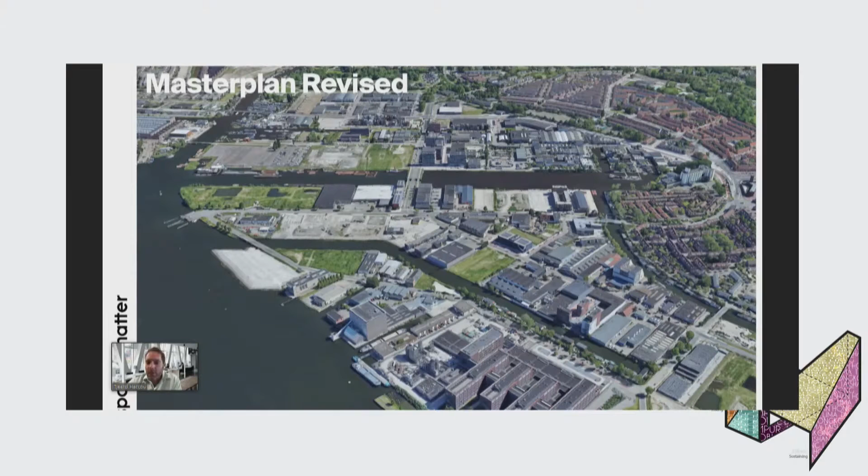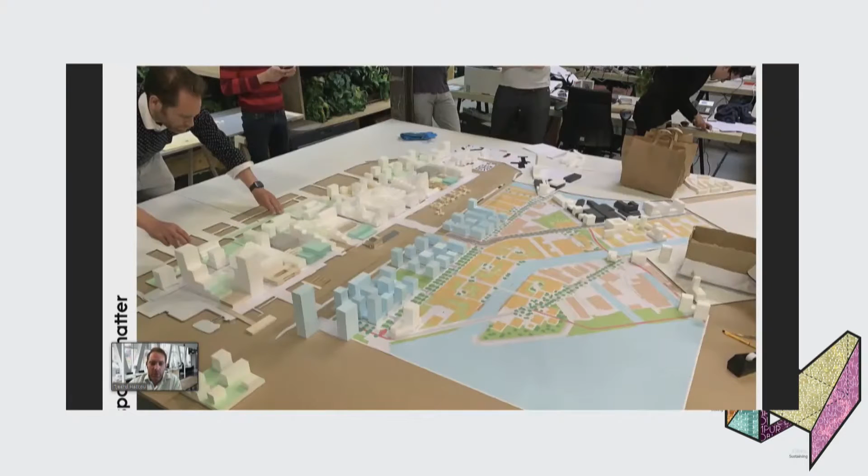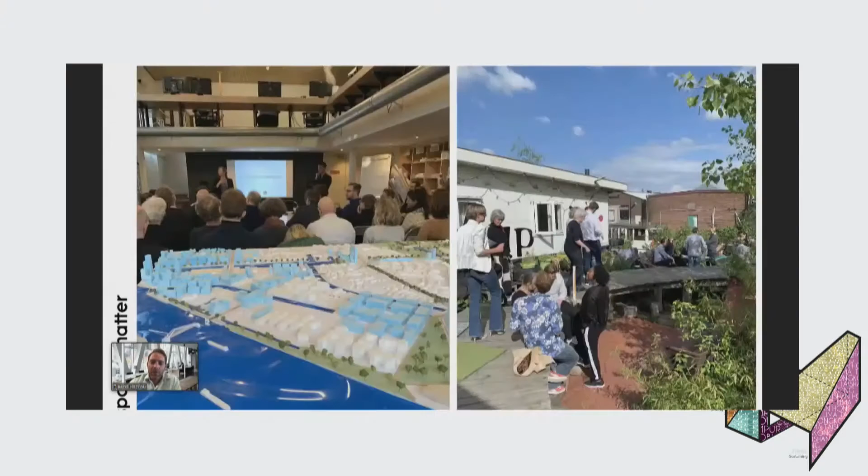Now I showed you 2 of these bottom-up initiatives, and then I go back to the master plan that we made together with Paco and some other architectural offices, because there was a lot of new developments starting in the Buiksloterham, and the master plan was just not there anymore. So we needed to change this, and that's when Paco invited us as one of 4 offices to think with him and the municipality about how we could make this new master plan. But not just us, also neighbors that already lived in the area had a say in this.

Here they focused on how to deal with the green in the area. One of the main topics in the master plan that we thought of was how can you embrace this pioneer DNA of the Buiksloterham? How can we reserve spaces for things that you cannot plan top down, but need to come from citizens themselves?

I think that was kind of fixed in the experimental zoning that we created. So there will be 60% of residential program in the area and 40% of different program. And of that program, 10% should be experimental. I think that is a real key ingredient to make a neighborhood really attractive, that there's new stuff happening all the time.

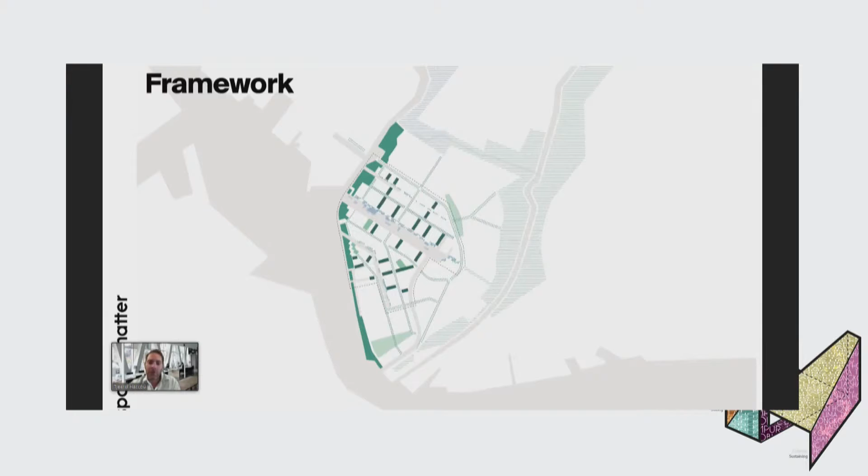So what we and all the other offices did is create not an urban plan or master plan, but an urban framework in which all kinds of initiatives can land. So the future of this area will look a bit like this. It is more about the density than about the actual shape.

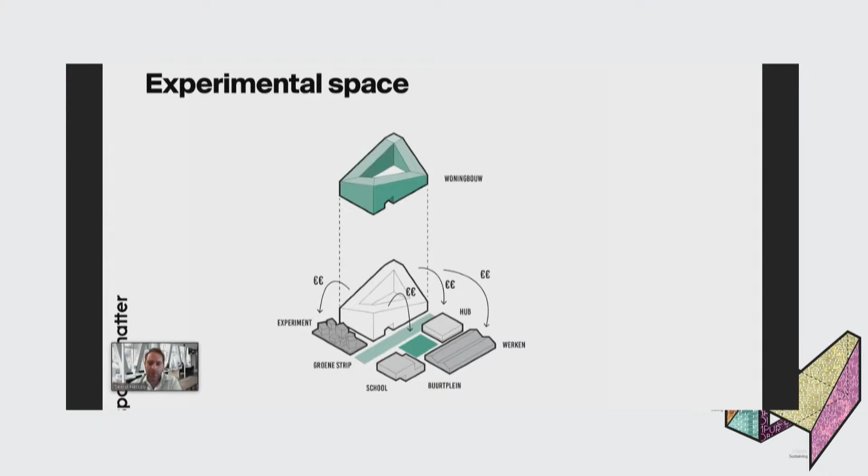And the experimental spots, which with my mouse I cannot show you, but there's a lot of them—10% is experimental kind of playground in the area, and they are paid for by the benefits of the commercial residential housing. So you can also make it financially feasible to have a low ground fee, low land fee for experimentation. I think that's a crucial element of this plan.

Also, the mobility hub that I showed you at Schoonschip looked pretty low tech. There are now plans to also use this model of mobility hubs all over the area, with the idea of having mobility parking above a plinth of activity, possibly also combined with schools in the area. And then this is the look of the canal that we see in the future.

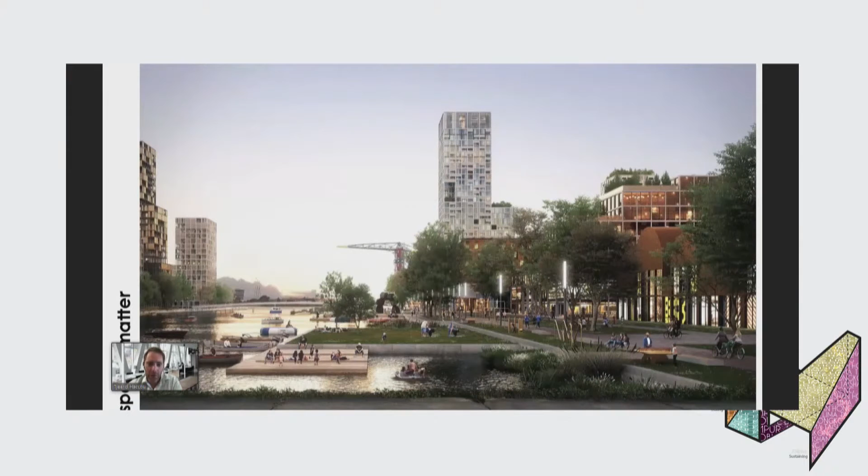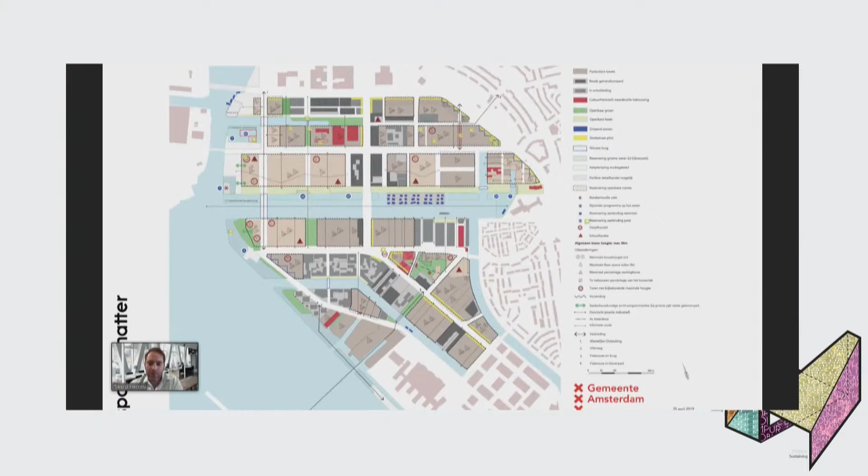Paco already showed the bigger model. A great model was produced showing what this could look like. And if you see the tower on the left, then we thought—so we also came up with a new bottom-up plan for that.

But before I'm going to show that to you, this new master plan led to a lot of activity and to a lot of new initiatives in the area that were, for a large part, also developed by neighbors or by new residents. But all these houses and projects have a very high grade of being self-sufficient and sustainable.

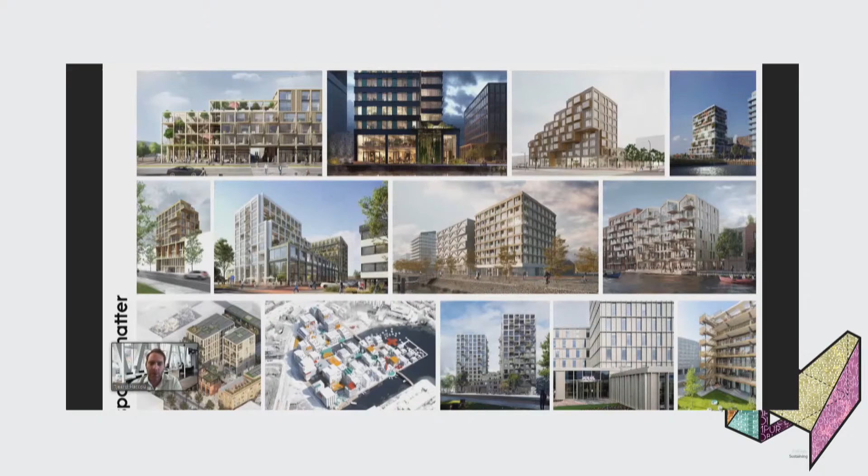So this is the tower that we envision. It's not actually Space and Matter that came up with the initiative—this is again a tower that was a dream of a group that calls themselves the Urban Tree Village, and they want to create a village kind of community, but in a high-rise tower. I think this is really a nice way to work on realizing dreams of groups of citizens and of communities, and to build up our cities with that in mind. So that was my part of the presentation.

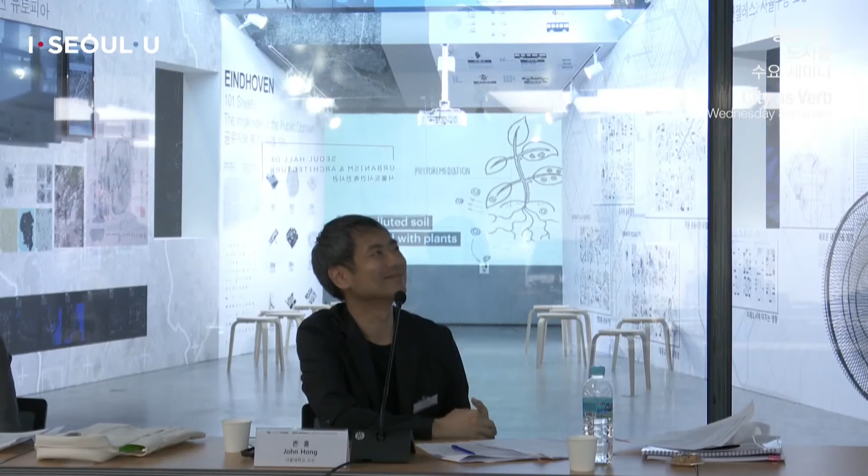I agree, and I also think political influence in that way can be important - that politics supports this kind of thinking. For example, scaling up from 1% to 10% of experimental space in cities is also a choice, and it costs you money, but it creates new value. So it's a different kind of approach.

Is the politics supporting? I mean, we have a wave of regressive, conservative, close the borders kind of things happening globally. What's it like over there?

In the Netherlands, locally we have a very progressive city board and city council which stimulates this kind of thinking and acting, and that can change overnight - when you have a new election, maybe a more regressive period will come. Then it's even harder to fight for this 10%. So I think we should also use this period to speed up.

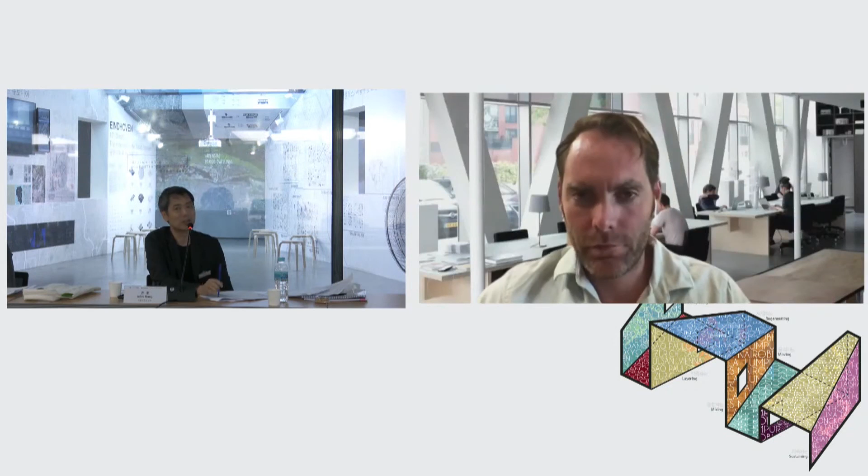I think personally it does create value in a deeper sense, and that's why we are also talking to you here, and we show what we show in Seoul.